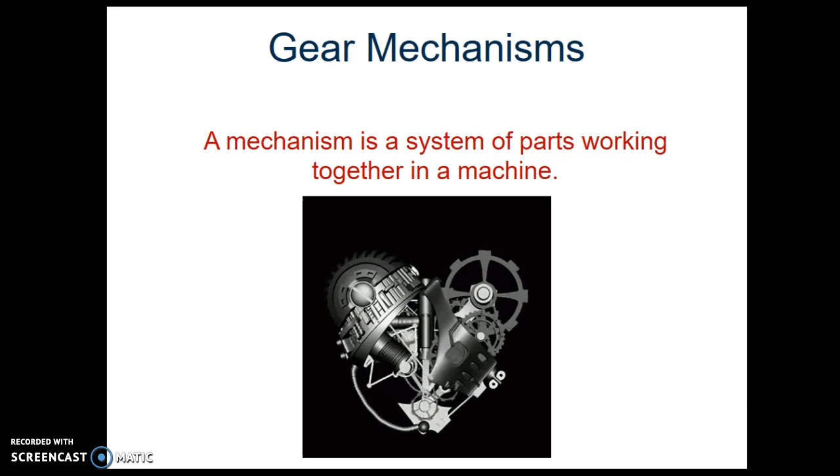Alright folks, it is time that we start building things today. We're going to build mechanisms, and by definition a mechanism is any system of parts that work together. For today we are going to start building something called a simple gear train, or a gear train with idler, and just look at how gears mesh together and how they transfer motion from one gear to the next.

To begin with we're going to have to build a gear base. This is going to be the platform that all of our mechanisms are built on, our starting point. When we are building over the next week or so, you are going to get a parts list so you know exactly what kind of pieces to get, and then you'll get a number of finished photos as well so you can see what it should look like when you're done.

A lot of the large metal pieces are going to be found in the back of the classroom on the table, and all these little small pieces, the nuts and bolts, are going to be part of a toolbox that you have to work with.

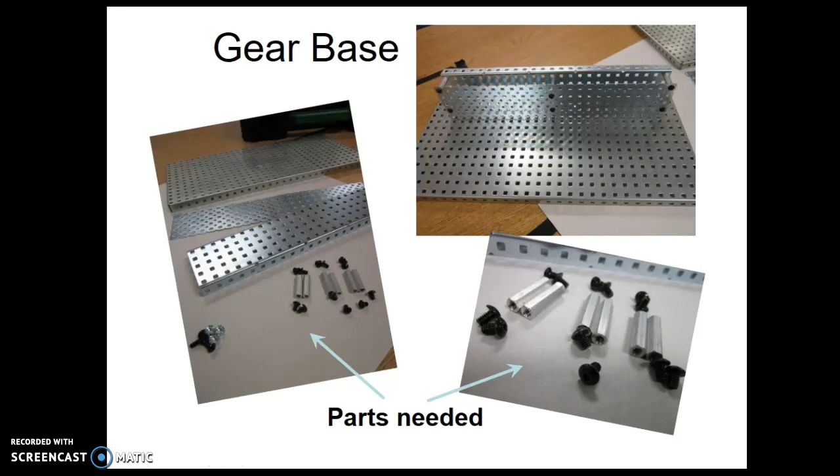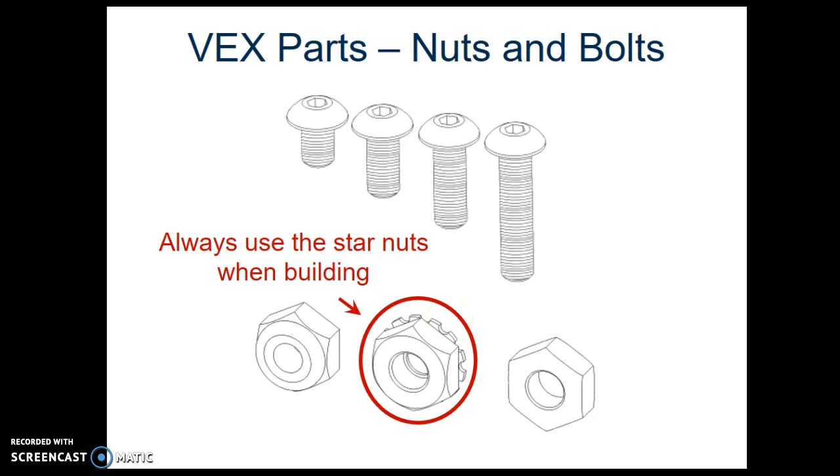We use the VEX series nuts and bolts. We call these star nuts, sometimes they're called Kep nuts as well. These are the ones we're going to use, so these are what you're going to look for. The star side always goes towards the top of the nut; it's the first thing you thread on when you're using them.

And then the plastic rivets, these black plastic pieces, we use to hold the drive shafts, or axles, in place so they have less friction and they spin more freely.

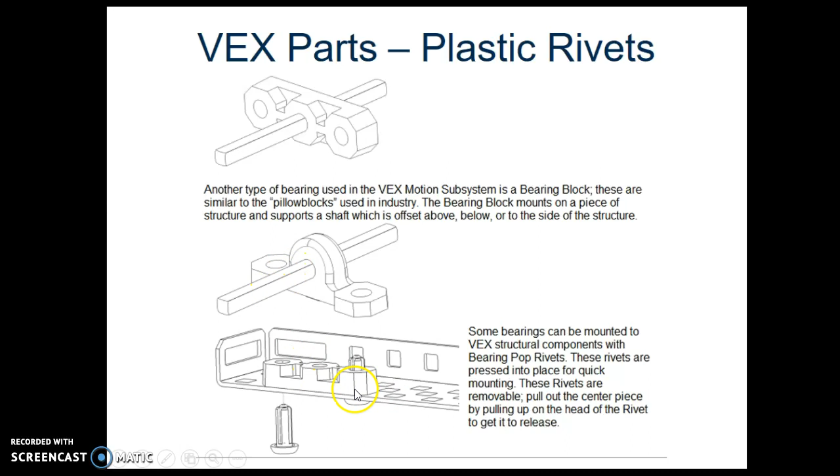Okay, so review: why do we use mechanisms? We're going to use these to change speed, torque, or direction from beginning to end, or we can change the type of movement, and we'll get to those later.

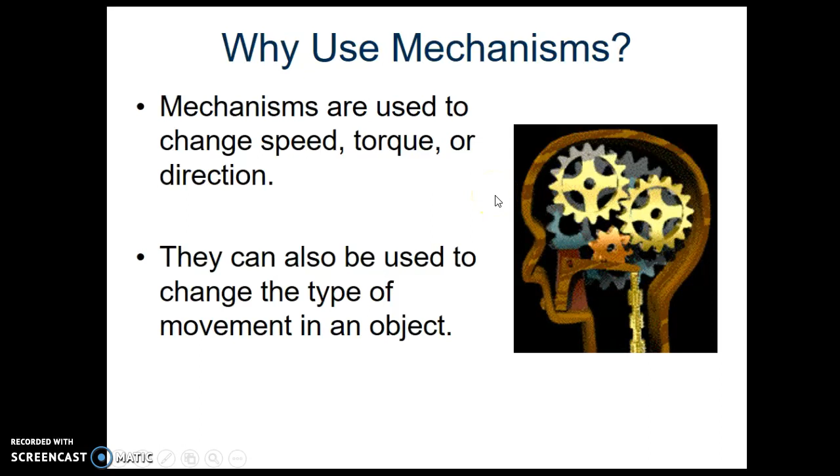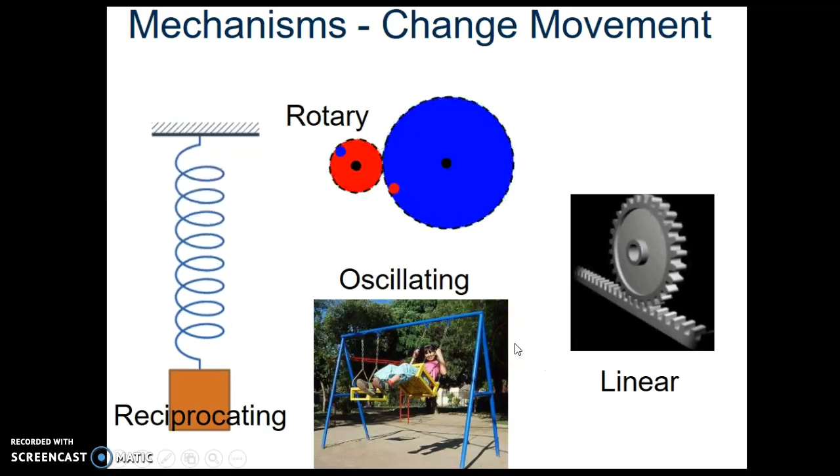At the beginning you could have a motion that's rotary and change it to reciprocating, oscillating, or linear motion, or go from any of these to any other point. Reciprocating means moving back and forth in a straight line. Rotary is movement in a circle. Linear is movement in one direction in a straight line. Oscillating is swinging back and forth, an arc that goes back and forth. So those are the ways that we can change movement in a mechanism from beginning to end.

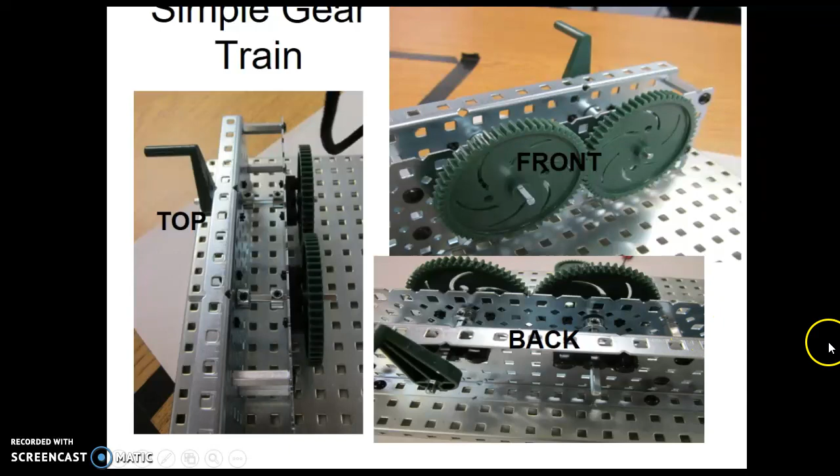Then we want to end today by building our first gear mechanism. This one's called a simple gear train, and it just has two gears that are meshed together. It has some pictures. We have a couple of these what are called collars, a handle, and some plastic rivets that are used to put the axles through. We're going to do all this in class so that we can get very adept, very good at building. Alright, so let's look at something else.

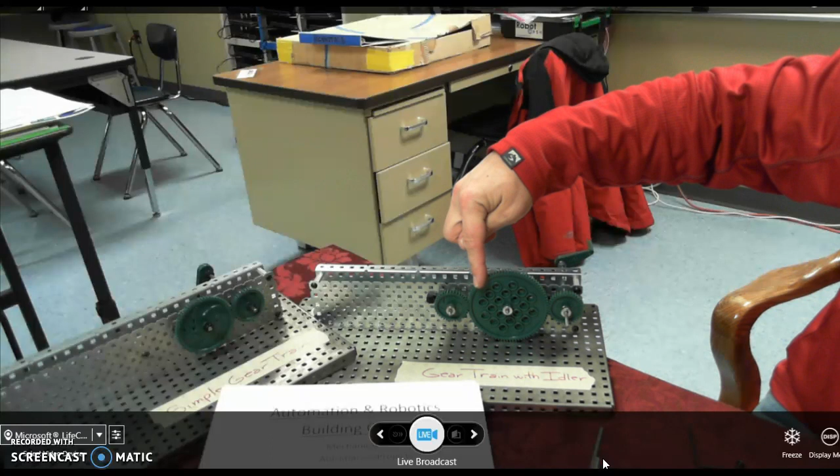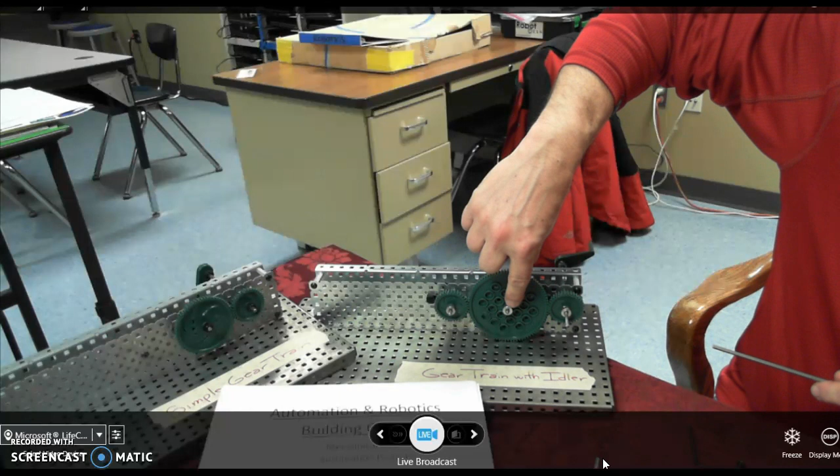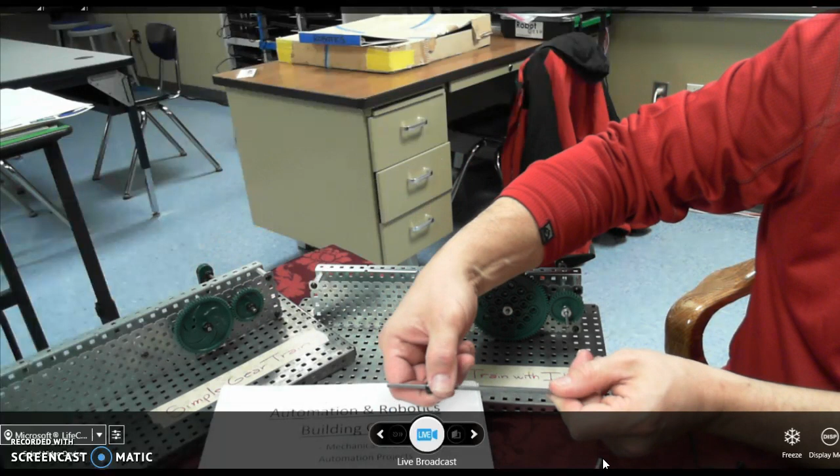As we get started, these long metal pieces are either called axles or drive shafts, and to hold these in place you may notice that on one of these there's silver collars, and on the other build, the simple gear train, there's these black collars. There's two different kinds. The black ones are the newer style, and to use the black collars I simply push them on. There's a little rubber liner in the center so that it doesn't just slide off, and I use this to prevent the gears or wheels or whatever from falling off of the drive shaft.

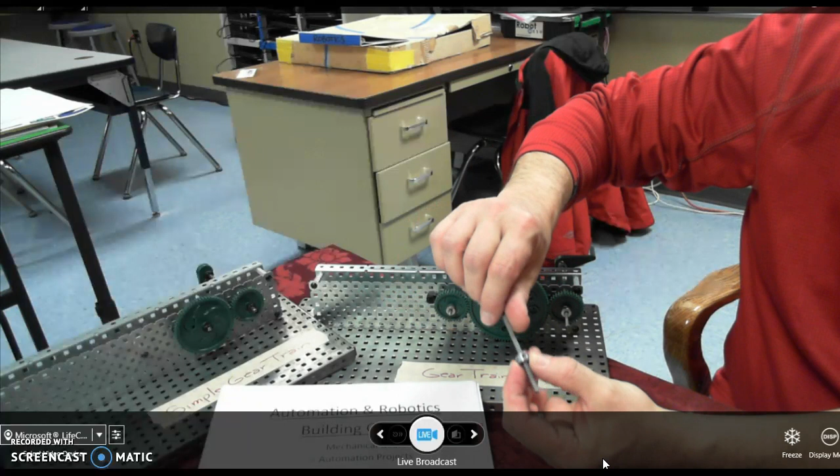The other kind you see here, the metal ones, have a tiny little screw in the middle. I would place these where I want on the axle and use an Allen wrench to tighten this small set screw in the center. This is called an Allen wrench, and I'd tighten it wherever I want that collar. I don't have to tighten it too much, and it'll stay in place so my gears or wheels don't fall off.

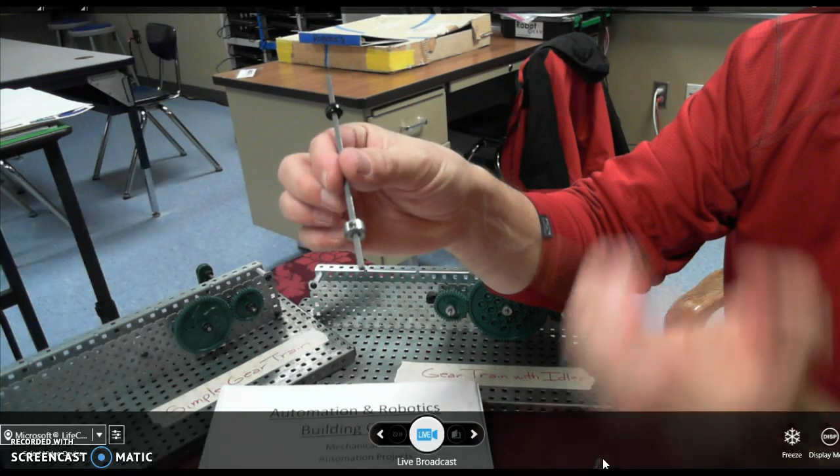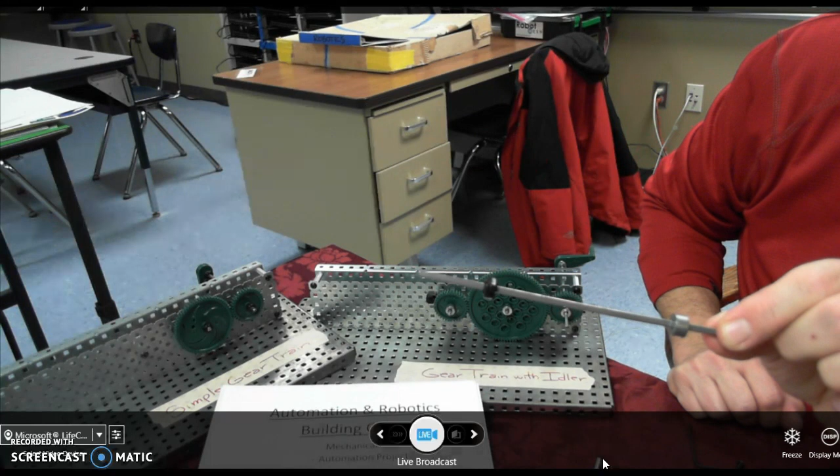Either one is fine, you may use either one. As I've been using them, these are so much more convenient. See if you can find those in your toolboxes, and those are going to work really well for you.

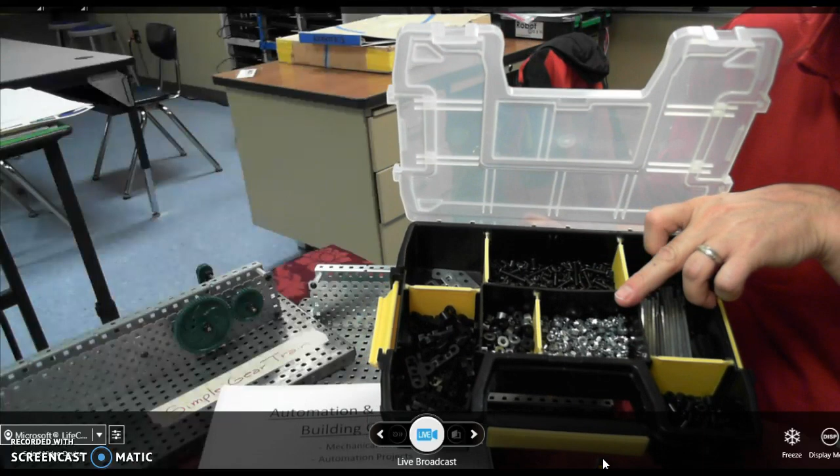Speaking of toolboxes, this is the toolbox that all your groups are going to work with. You should notice there are smaller axles in here, a bunch of the star Kep nuts, many different size bolts, and here are those collars we talked about. You see they're mixed in there - there's the black rubber ones, and the silver ones that need the Allen wrench. And some other parts in here as well.

When you start building, how are you going to decide what to build? We have one of these catalogs, and for each build there's going to be a parts guide to go along with it, with pictures and everything else.

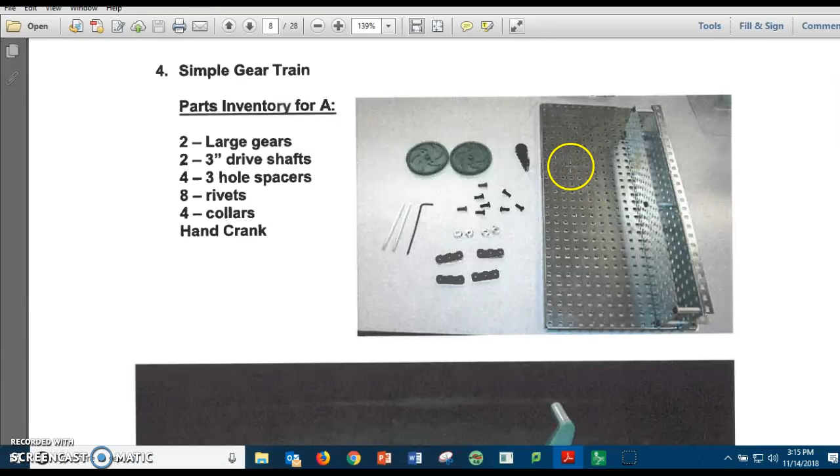So the first thing we're going to look at is called a simple gear train, and that might be what you want to build. Let me give you a little different view, a closer view. Here would be a parts inventory for the first simple gear train. Notice the gears in this one are the same size. Pictures show how to put it together.

And then there's another inventory for simple gear train B. You do not have to build both of these - choose either A or B. The difference is this one has different size gears. Otherwise all of the other parts are going to be the same.

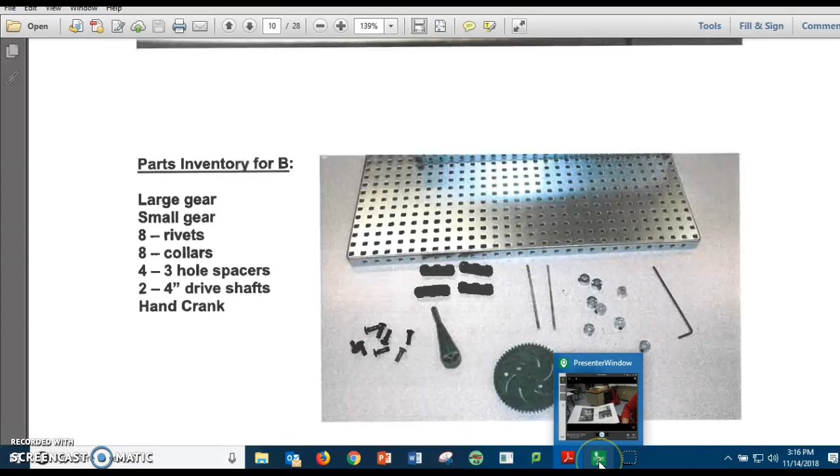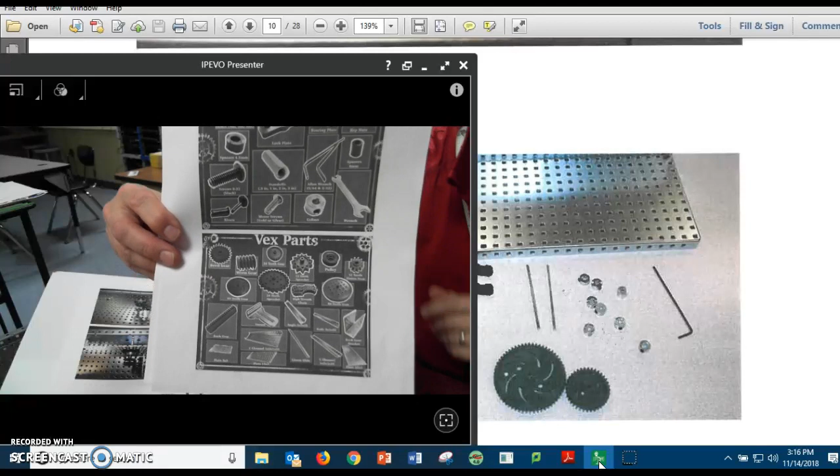The parts inventory - if you don't know what a rivet or a collar is, look at the back of your worksheet, your stamp sheet. There's a guide there that shows the things you'll find in your toolbox and what they're called, and the parts that will be on the back table as well.

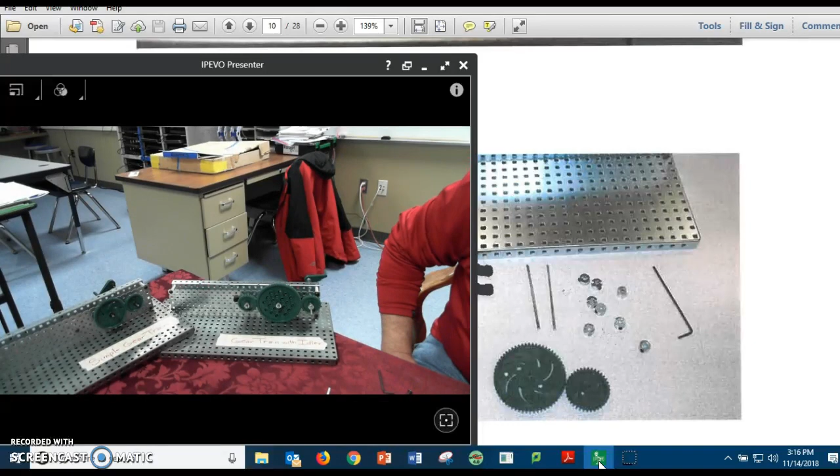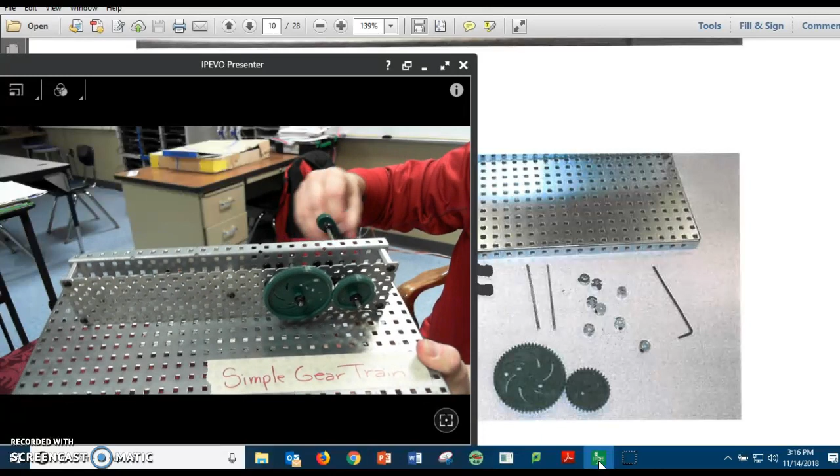So what do we have? Here's your choice on your first gear mechanism. You either have a simple gear train, which should have a handle in the back, and as I turn one gear, notice the teeth are meshed, both gears spin, they spin very easily and freely, there's not a lot of noise or rubbing. That is a simple gear train.

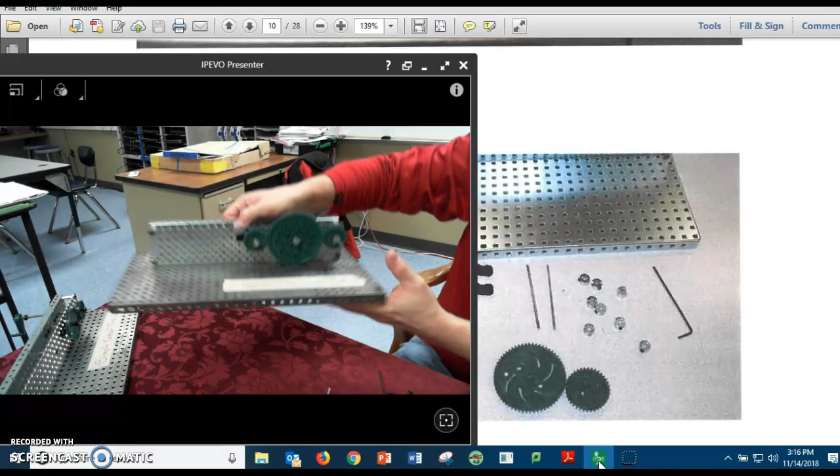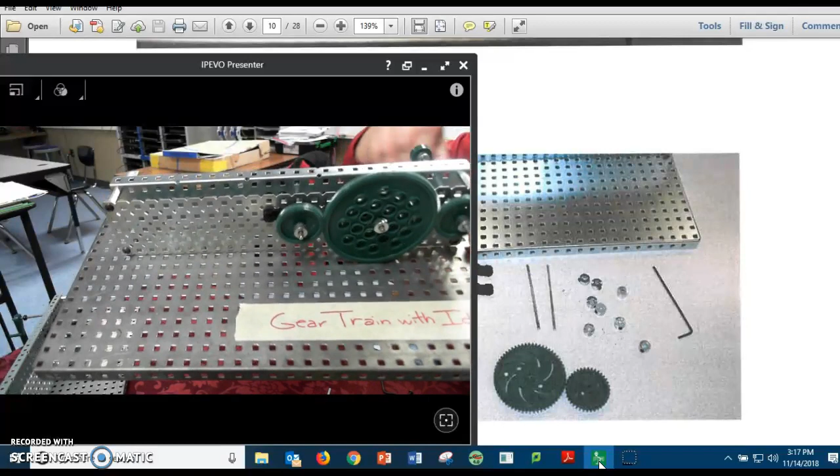If you want something a little more complicated, because gears are kind of cool, you can build what's called a gear train with an idler. There's a handle again on the back. As I turn it, all gears turn - it's a smooth motion, they're meshed fairly well.

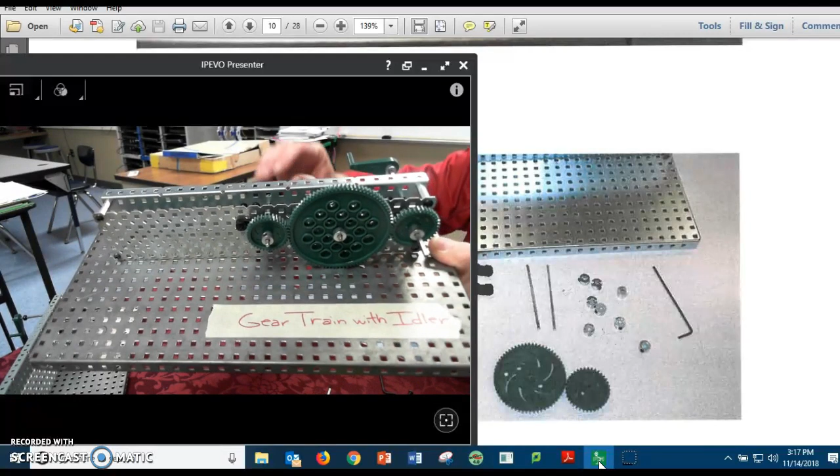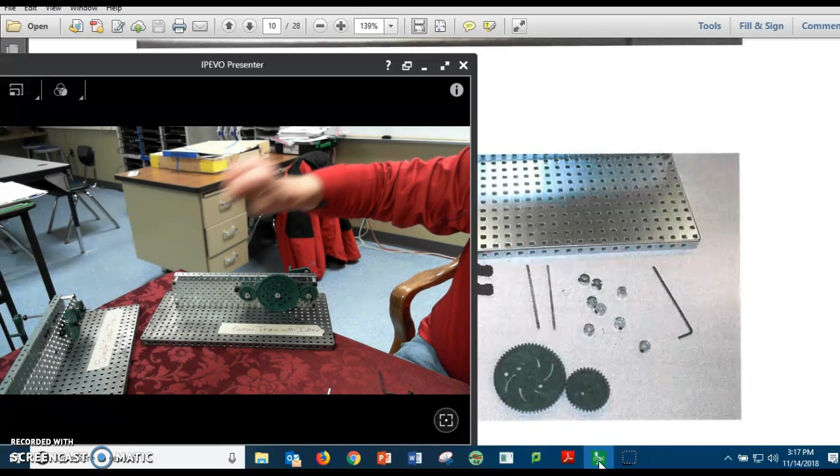When you get done choosing which one of these to build, let me know. I want to investigate your work, make sure it's up to safety standards, that it's built very well and solidly, and I'll ask you a couple of conclusion questions. So your first build - choose between a simple gear train or a gear train with idler. Good luck.